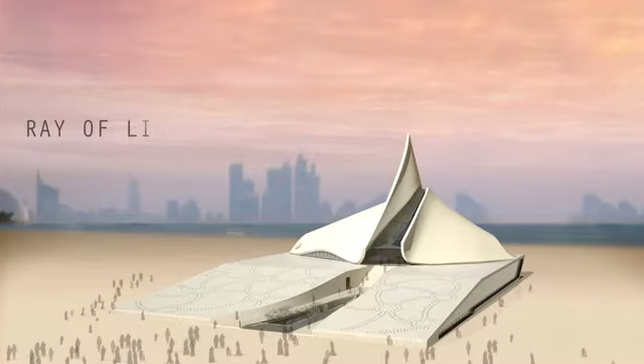We came up with the idea of the ray of light for the mosque because we wanted to create one unified space where both the men and the women could pray together at any given time, and they would be together in one space and yet be separated. We basically looked for a solution for that and came up with the sort of curtain of sunlight during the day and artificial light at night, which separates them, and yet it doesn't really exist, which we thought was rather poetic.

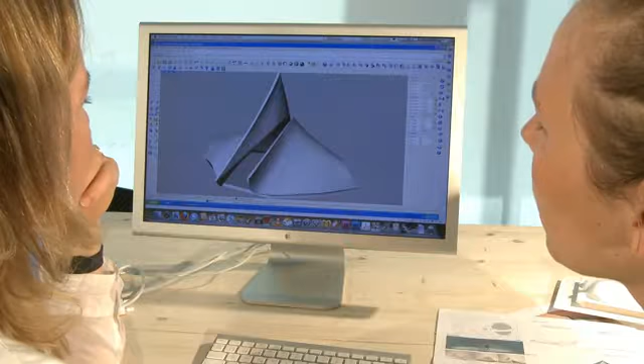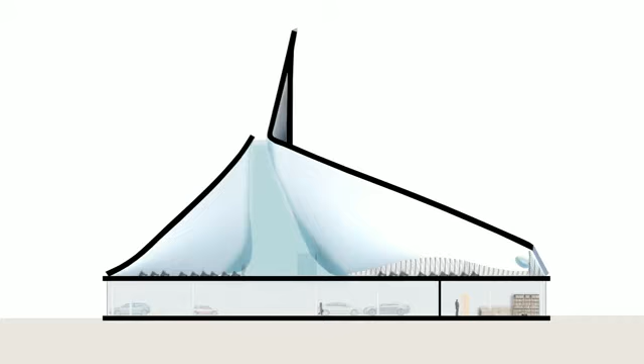One thing that we wanted to do in this project is that the minaret is integrated in the shape, not an element apart, so we can unify the whole building and create a shape that incorporates in itself the minaret. We were very consciously looking for a dome-like shape, but we didn't want a classical symmetrical dome, so we were looking at surfaces and shapes that would hold themselves up.

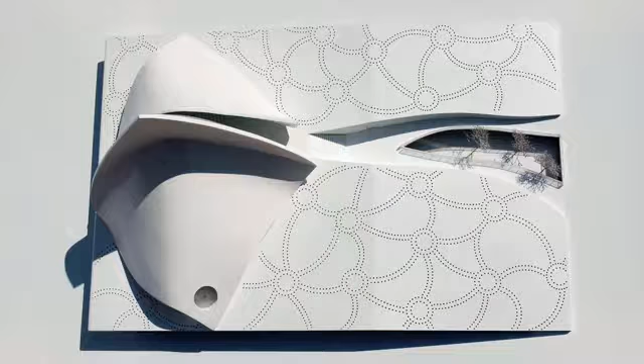And well, out of our experiments came this shape together with the verticality of the minaret and the fact that we turned it 45 degrees so that the whole point of the building would face the Qibla axis instead of having a perpendicular Qibla wall. We feel that that is more unifying because then again the whole space of the mosque is pointing in that direction.

Well, the base is the element that allows the mosque to rise from the terrain. And it also, because of its not square but rectangular shape, allows to create a path to the mosque. So we believe that this path is a path to a sacred moment, to a sacred state of mind.

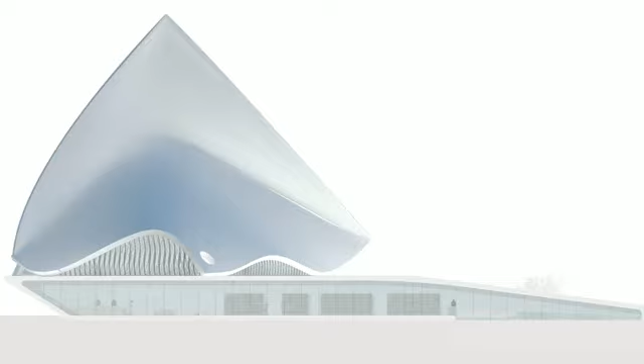That is also the reason why the entrances to the other functions of the building, like the library, the community center, which has very much an educational function, they will have their entrance either on the side or the back of the building, because we didn't want to disturb this path to purity and to the mosque.

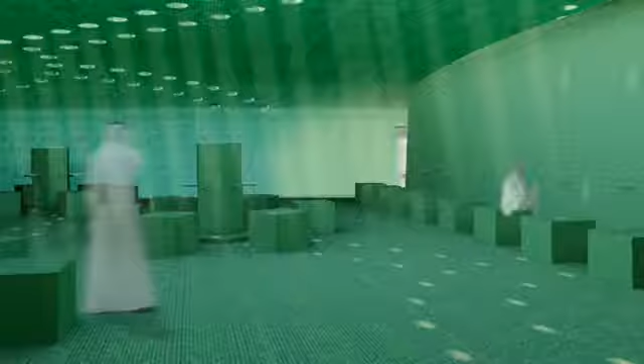So we were looking for patterns that would bring light into the building, which is what is in the end happening on the terrain. There's a whole pattern, almost like strings of pearls, which are in fact glass blocks, which bring light deep into the library, into the ablution areas, and so at night it lights up the terrain, and it basically sort of lifts up the mosque again visually. It's a bit like a jewel, we think. It sparkles.